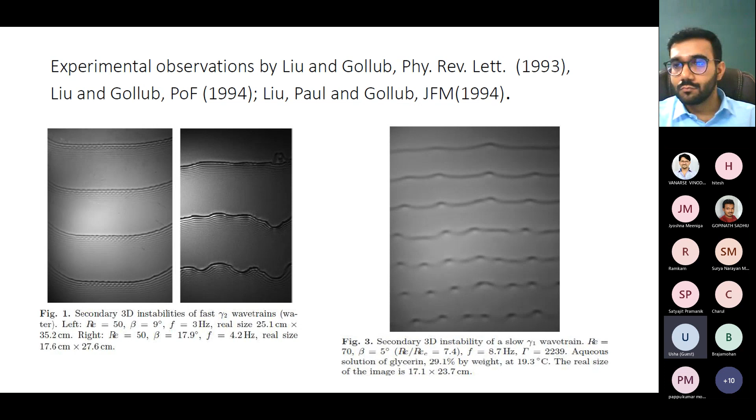As you see in these pictures, it displays a rich variety of spatio-temporal structures and also a sequence of wave instabilities and transitions. These are generic to a large class of hydrodynamic and nonlinear systems.

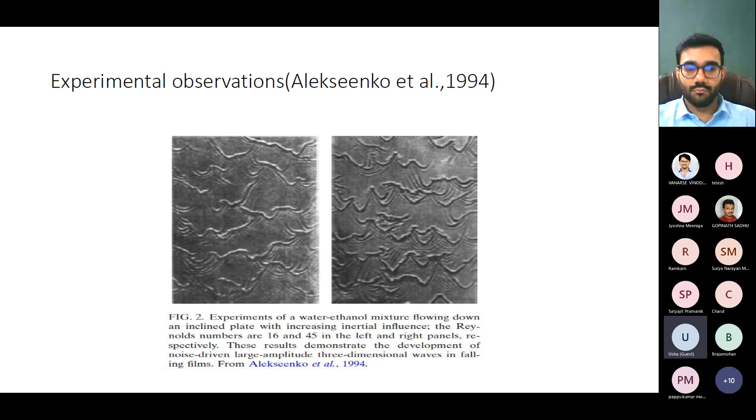The pictures you have seen are experimental observations by Alekseenko and co-workers, and the earlier ones are from Liu and Gollub's experiments. Although the structures in the earlier pictures look very complicated, it is still possible to identify robust coherent structures, namely solitary waves, in thin films that appear to be a randomly disturbed surface. These solitary waves interact with each other continuously.

Therefore, falling liquid films can serve as canonical systems for the study of spatio-temporal chaos. Further, falling liquid films are typically associated with low flow rates and low pressure drops, small thermal resistances, and large contact area per unit volume.

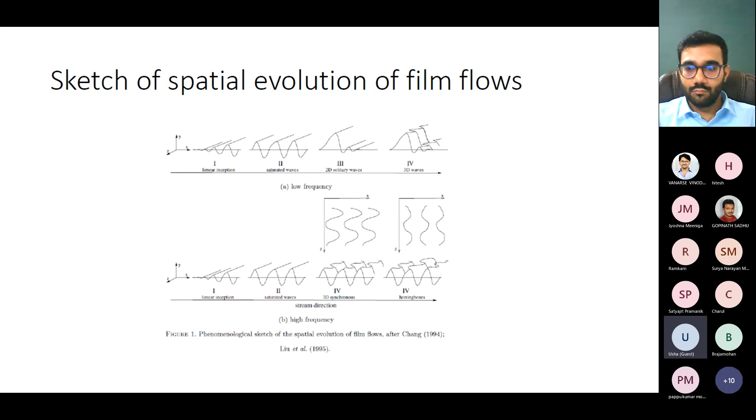So it's not a surprise that falling liquid films play a central role in a wide spectrum of engineering applications that includes cooling and coating processes. Therefore, there is a need for accurate understanding of the hydrodynamics of this class of systems, because it is crucial in the design of devices that exploit falling liquid films.

It is with this in view that several models have been developed, and extensive work has been done. These studies can all be viewed in the review works by Oron and Davis in 1997, and Craster and Matar in 2004, and also the nice book by Chang and Demekhin published in 2002.

So what do these investigations tell us? The results tell us that the solution is unstable to long waves if the Reynolds number exceeds 5/6 into cot theta, where theta is the angle of inclination of the inclined plane to the horizontal. So solving the Navier-Stokes equation with a free surface which is unknown a priori is a difficult one.

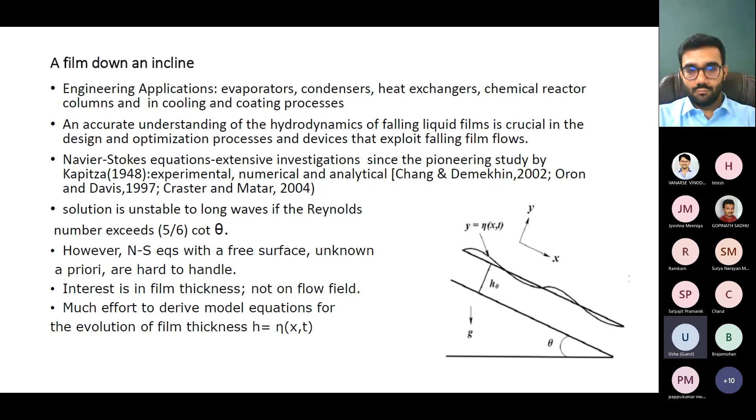It's very hard to handle, and the interest is only in how the film evolves, namely determining the free surface thickness and not the flow field. Therefore, the efforts have been towards deriving model equations for the evolution of the film thickness.

The pictures we have seen clearly show us that the space-time evolution of waves are slow at low to moderate Reynolds numbers. In addition, we observe that the internal fluctuations remain slaved to the local film thickness H.

This suggests that one need not solve a three-dimensional problem. One can completely eliminate the cross-stream velocity from the velocity field, reducing the three-dimensional problem to a two-dimensional problem. This can be further simplified to a one-dimensional problem so long as the secondary instabilities do not introduce any span-wise modulations.

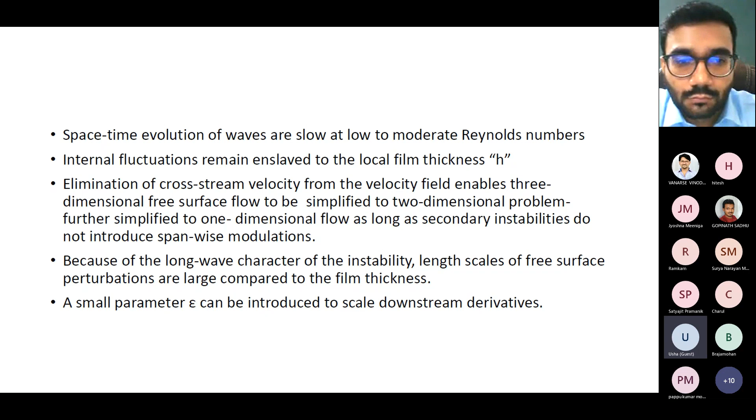So what happens? We have a long wave character of instability, and hence the length scales of the free surface perturbations are large compared to film thickness. So that helps us to introduce a small parameter. Suppose I call it epsilon, so that we will be able to scale down these downstream derivatives with the help of this small parameter.

So all these features that we have listened to so far suggest that we should be able to employ a modeling strategy that makes use of this long wave character, namely that there is a small parameter epsilon, and Benney made use of this modeling strategy.

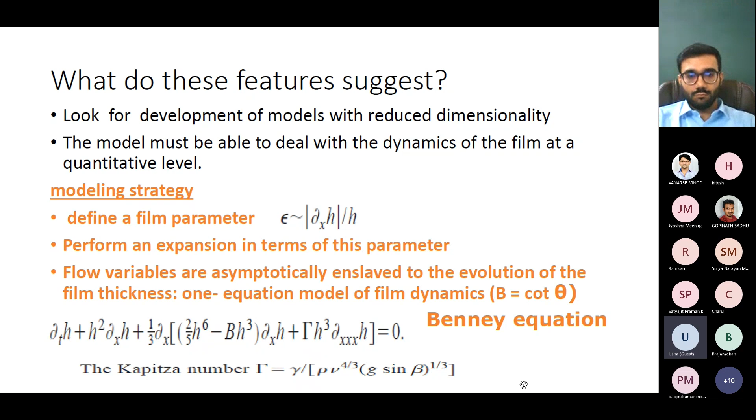He expanded all the flow variables in terms of the small parameter epsilon, and under the assumption that the flow variables are all asymptotically enslaved to the evolution of this film thickness H, he ended up with a one equation model. This equation had only one unknown, the film thickness H, and this is referred to as Benney's equation, a one equation model that describes the evolution of film thickness of a thin film over an inclined substrate.

But unfortunately, there are drawbacks in Benney's model, in that the solution has a finite time blow up not far beyond the threshold, in spite of the regularizing effects of the surface tension.

So there were efforts to cure this drawback by including higher order terms when the expansion with respect to epsilon is considered. However, a Pade resummation technique was also employed, but all these did not yield satisfactory results. They ended up only in underestimating the amplitude and wave speed of the solitary waves.

So what do we get as the message from the one equation model? The one equation model is not at all capable of describing the dynamics of this thin film sufficiently far from the threshold. Therefore, it is of no use taking the one equation model, namely that developed by Benney, for describing the dynamics.

Although the only advantage here is that it could correctly predict the instability threshold, it could not avoid a finite time blow up.

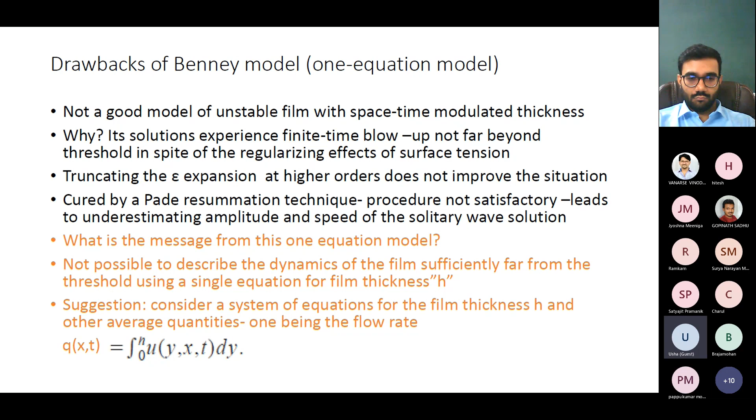So Shkadov took this suggestion and developed a two-equation model with two unknowns, one being the local thickness, and the other being the local flow rate, namely Q.

And his assumption was - what did he do? He started with a streamwise parabolic profile U, and using this, integrated the streamwise momentum equation and the continuity equation by taking U as this profile. He ended up with evolution equations for the unknowns H and Q, which are these two equations.

What was his assumption? The assumption was that the velocity remains self-similar and parabolic even out of equilibrium. That was the basic assumption underlying Shkadov's model.

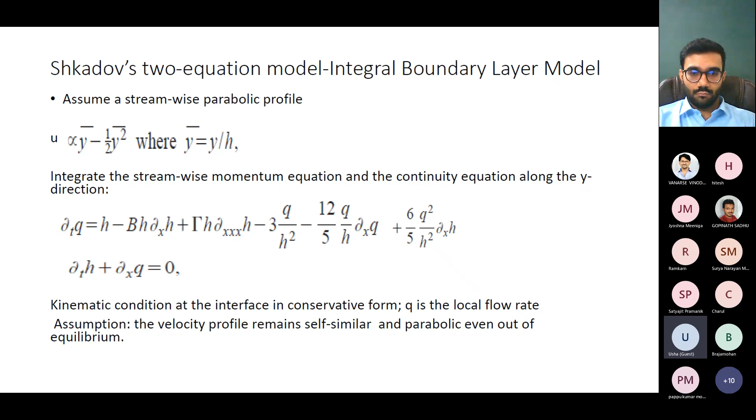But again, this two-equation model had some limitations, namely it could not predict the instability threshold accurately. The instability threshold predicted by Benney's model is 5/6 cot theta. Not only Benney's model, the experimental predictions also gave the result as 5/6 cot theta.

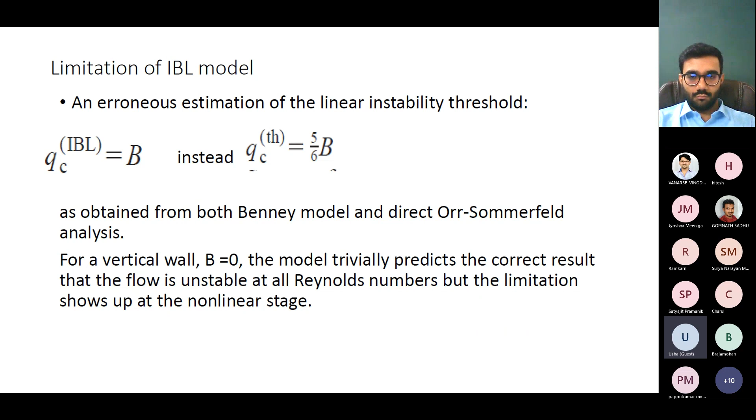But Shkadov's model predicted it to be simply cot theta, and therefore the prediction was erroneous, although he took into account two unknowns h and the local flow rate. When b equals 0, that is for a vertical wall, his prediction trivially was correct, that the flow is unstable at all Reynolds numbers, but the limitation in the model showed up while describing the nonlinear evolution.

So what was the reason for this failure of the two-equation model? It was attributed to the lack of flexibility of the assumed parabolic profile. That is, the assumption that the flow remains parabolic even out of equilibrium was basic in the development of Shkadov's model, and that did not give any flexibility to the model, as it cannot remain parabolic as the film evolves.

So there will be some deviations. Being a thin film, the deviations should be properly accounted for while taking the velocity ansatz. That did not happen when Shkadov assumed that the velocity is self-similar and parabolic. People tried to cure this failure by assuming a generalized parabolic profile, or parabolic profile with Pade approximation, and other things, but they were not successful. The experimental observations and numerical predictions clearly showed deviations from the parabolic profile, which is the reason for the failure of Shkadov's integral boundary layer model.

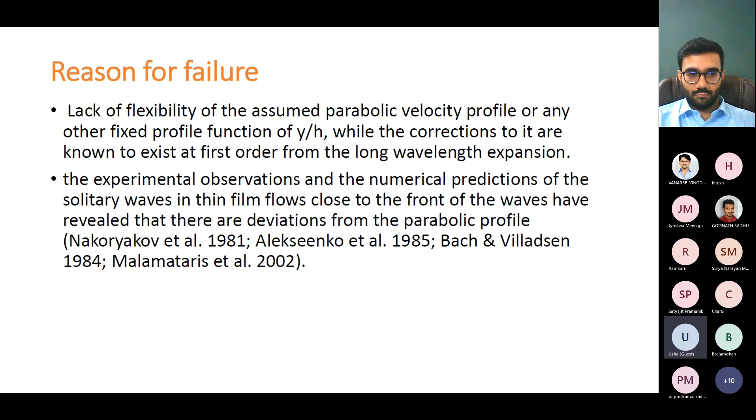Following this, there were several investigations, as I said, using the general parabolic profile, or the energy integral approach which accounts for energy balance, or a self-similar parabolic profile with Galerkin projection considered in center manifold analysis. All these gave the instability threshold accurately. However, the quantitative predictions regarding wave speed and wave height were not as accurate as the experimental observations.

Then Ruyer-Quil and his group developed the weighted residual technique, which Dr. Sangashri also spoke about. This weighted residual technique was able to predict as closely as possible the non-linear wave characteristics, and it became the standard technique for solving thin film flow problems down an inclined substrate, taking into account different aspects associated with practical applications.

And recently, Amaouche and his group worked on a model where they considered the double weighted residual integral boundary layer model developed by Ruyer-Quil and his group. But they introduced a free parameter which helped refine the velocity profile, and this free parameter acted as a parameter that can be tuned to get the desired wave characteristics. They showed substantial improvement in the predictions in the inertia-dominated regimes.

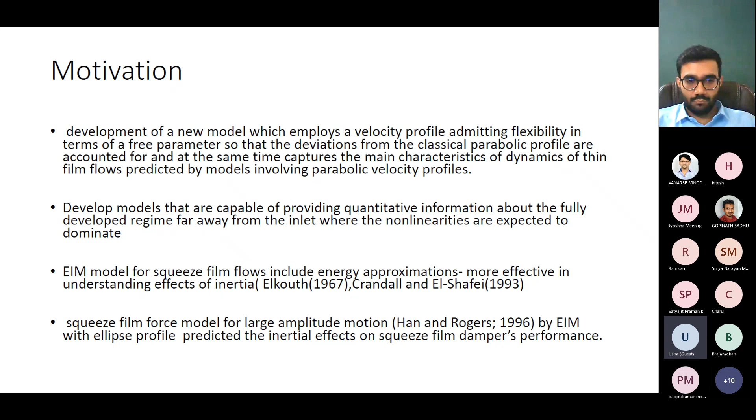It should be less than 1, which is the condition when we take an ellipse profile, but this constraint helps us tune the profile in such a way that we are able to arrive at the desired wave characteristics. So with these two ideas in mind, we thought we would develop an energy integral model with an ellipse profile as a weight function and develop a two-equation model.

So with that in mind, we started our model derivation. Our Navier-Stokes equations with the continuity equation are the governing equations, and the boundary conditions are no-slip at the inclined substrate, and at the free surface y equals eta of x, t. The conditions are the kinematic free surface condition, and the balance of normal and tangential shear stress at this free surface.

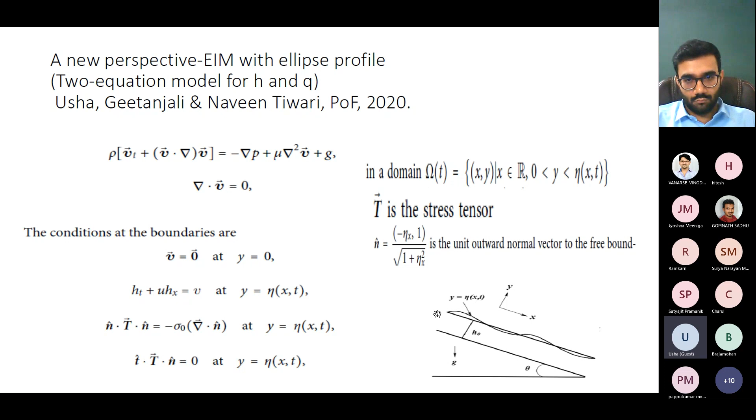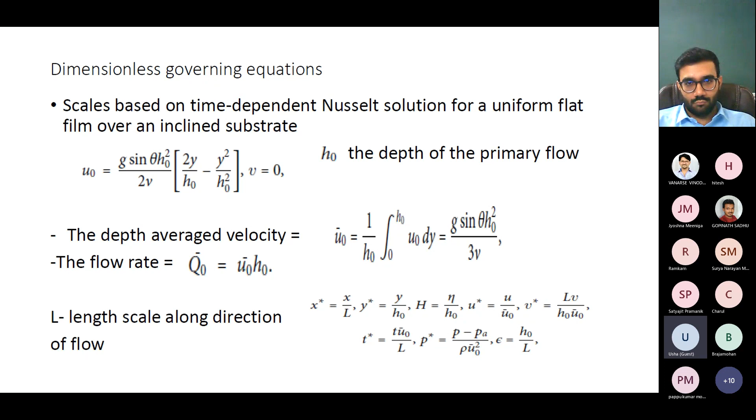So we wanted to non-dimensionalize the governing equations. We took scales based on the time-dependent Nusselt solution, and the corresponding dimensionless equations and boundary conditions were obtained. So, as I said, our goal was to derive a model.

We did not aim at developing a model which would be as accurate or more accurate than the standard WRI-BL model. This was our first attempt to derive a model which doesn't involve a parabolic profile, but which should be capable of predicting the linear instability threshold accurately, and capable of predicting the nonlinear dynamics at least as well as the available standard model. The available standard WRI-BL model is a second order consistent model, so we thought we would be happy with a first order consistent model that could predict the instability threshold accurately and capture the nonlinear dynamics as accurately as possible.

With that as goal, we started working on the details. Our goal was to develop a two-equation model which is first order consistent, describing the local film thickness and the local flow rate. The model would take care of the energy balance, and it would use the ellipse profile, and therefore there is eccentricity intrinsic to the ellipse profile, which can be tuned to get the desired characteristics, so that our model is able to capture the results which are already available. Does it perform as good as the available models? Once we are satisfied with that, we can work more on it and develop better models to get the desired characteristics as predicted by experimental observations.

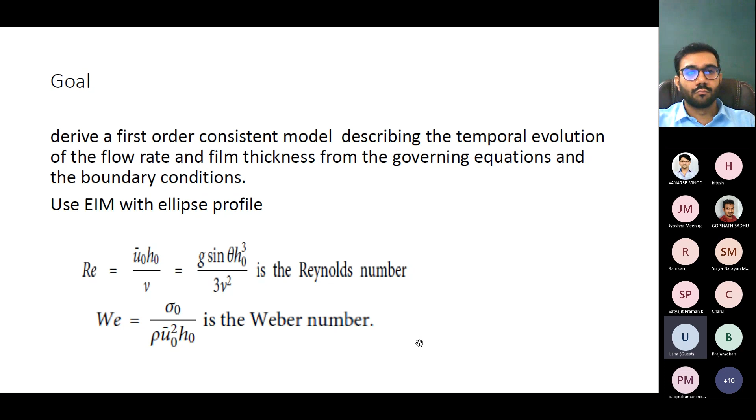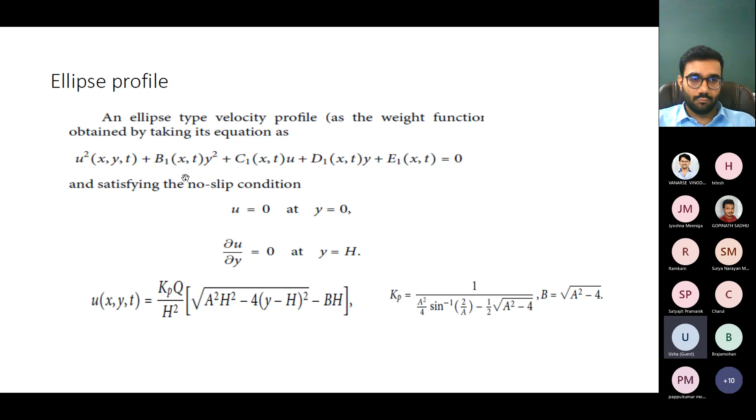So with that as goal, we worked to derive the ellipse profile. We took the general equation of the second degree and applied the boundary conditions to get the profile, which we wanted to use as the weight function as in Galerkin approaches. The no-slip condition at the substrate and no shear stress at the free surface, when applied, gave us this profile, which can be written in the form of an ellipse. This told us that the ellipse profile satisfying these conditions has major axis kp squared into a squared, minor axis a squared by 4, related by b squared equal to a squared into 1 minus e squared, where the equation of the ellipse is x squared by a squared plus y squared by b squared equal to 1.

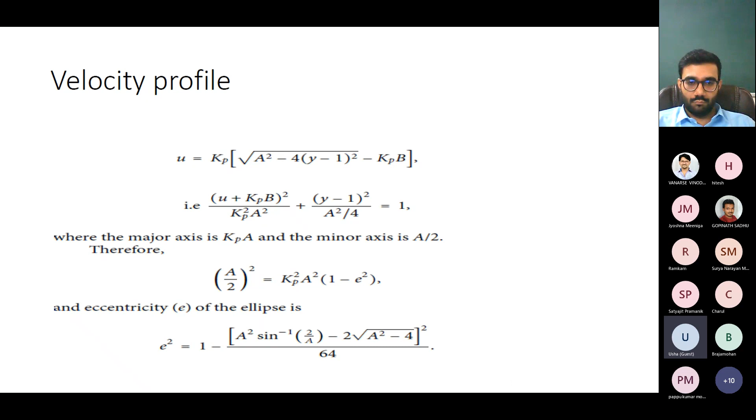So we see that the eccentricity of this ellipse profile is expressed in terms of this free parameter a. By varying the parameter a, tuned with the condition that e remains less than 1, we should be able to arrive at a model capable of capturing the instability threshold accurately and performing as good as the available models as far as the nonlinear dynamics is concerned. So we varied this value of A, and observed that as A is increased, the eccentricity increases and approaches the value 1. This parameter A modifies the ellipse profile, serving as a free parameter which can be tuned to achieve the desired wave characteristics.

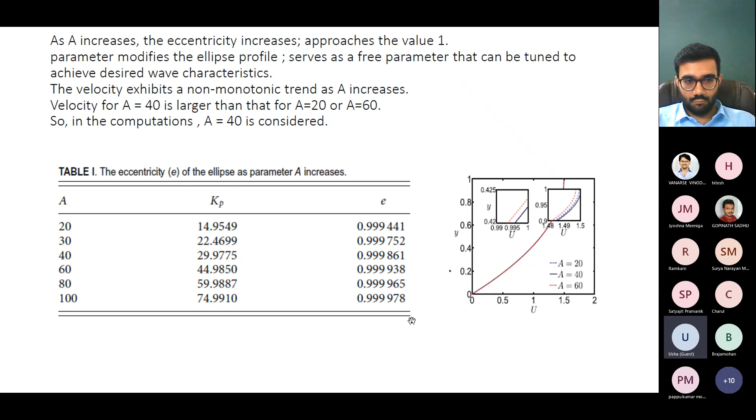We observed that the velocity exhibited a non-monotonic trend as A increases, so the velocity for A equal to 40 was larger than for A equal to 20 and 60, so we took the value of A equal to 40 in our computations. This is not the only reason we took A as 40 - from the nonlinear analysis also, we would be able to show that A equal to 40 is an appropriate value with which we can work so that we are able to achieve the desired goal.

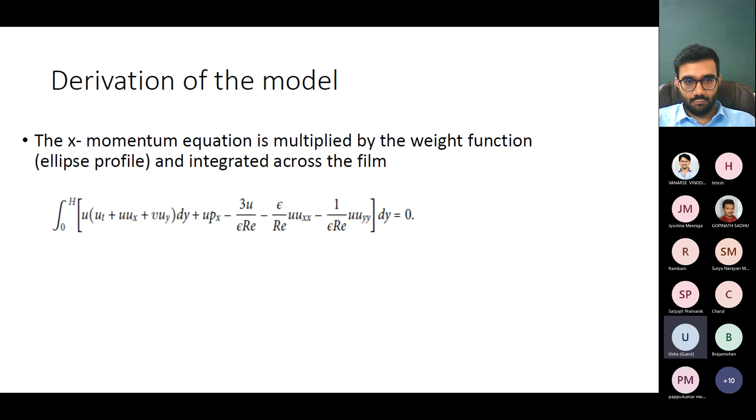So what did we do? We took the ellipse profile, multiplied the x-momentum equation with u so that the energy balance is accounted for, integrated across the film thickness, and ended up with a two-equation model involving the local film thickness H and local flow rate Q. With this evolution equation, we wanted to see what it gives for the instability threshold, so we imposed infinitesimal two-dimensional disturbances on the base flow in order to determine the instability threshold predicted by this model.

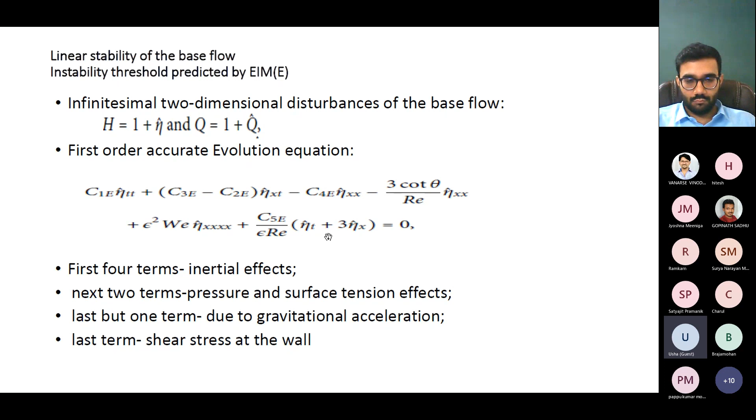We ended up with the evolution equation as this. The first four terms in this equation contribute to the inertial effects. This term and this term tell us about the pressure and surface tension effects. The term here, eta hat suffix t, arises due to gravitational acceleration, and the last term is due to the shear stress at the wall.

So we took a wave-like disturbance, a sinusoidal disturbance, and substituted it into the evolution equation, ending up with a dispersion relation, which is a quadratic equation for the complex phase velocity c. The real part gives us the phase speed, and the imaginary part gives us the linear growth rate.

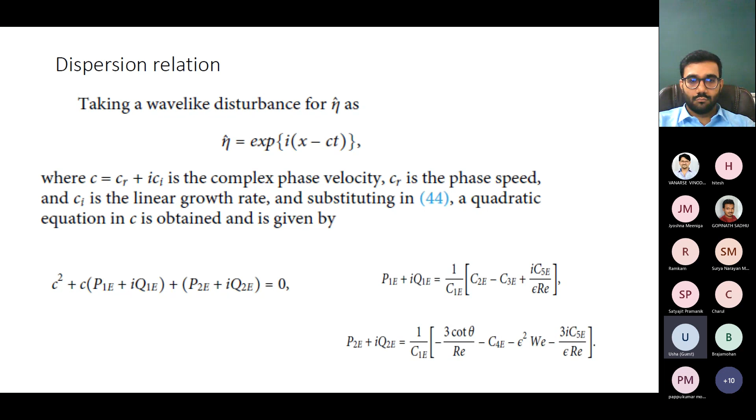So when the linear growth rate Ci is greater than 0, the flow is unstable. Ci less than 0, the flow will be stable, and Ci equal to 0 gives us the neutral boundary, which splits the parameter regime into stable and unstable regions.

So we drew the marginal stability curve by taking Ci equal to 0. That gave us the instability threshold as cot theta by Re equal to the right hand side, which depends on this parameter capital A.

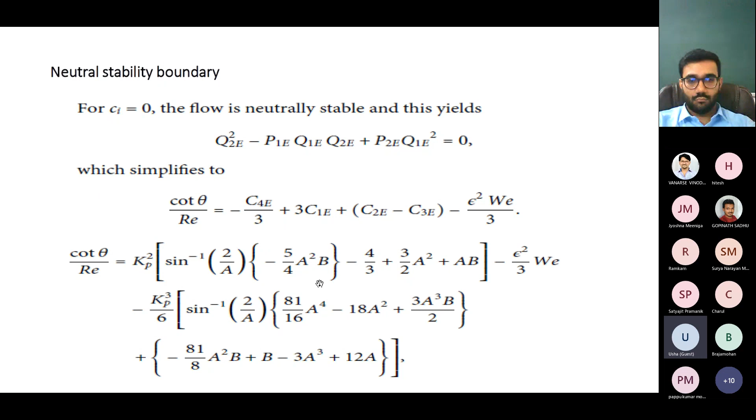So we wanted to plot this cot theta by Re. We saw that cot theta by Re asymptotically approaches the value 1.2, which is the critical value predicted by the available standard model, the weighted residual integral boundary model, and the energy integral model by taking a parabolic profile as the weight function.

So we named this model EIME, to say that it is the energy integral model with the ellipse profile as the weight function. So I refer to the model as EIME.

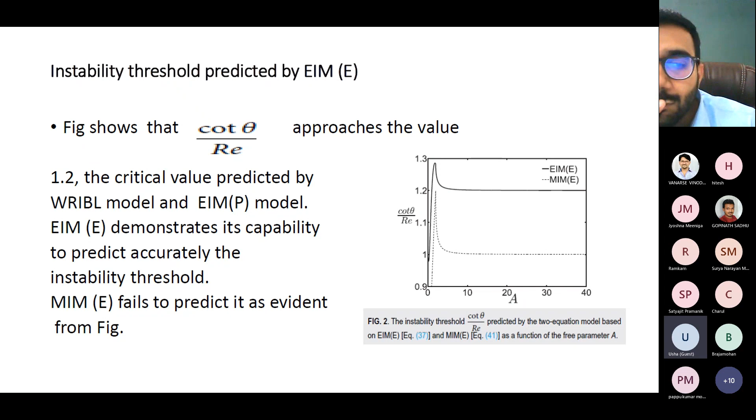This EIME model demonstrates its capability to predict asymptotically the accurate value of cot theta by Re, equal to 1.2, which was predicted by experiments as well as the available standard model. Whereas the momentum integral model, derived by Shkadov, could not predict this value because of the lack of flexibility of the parabolic profile.

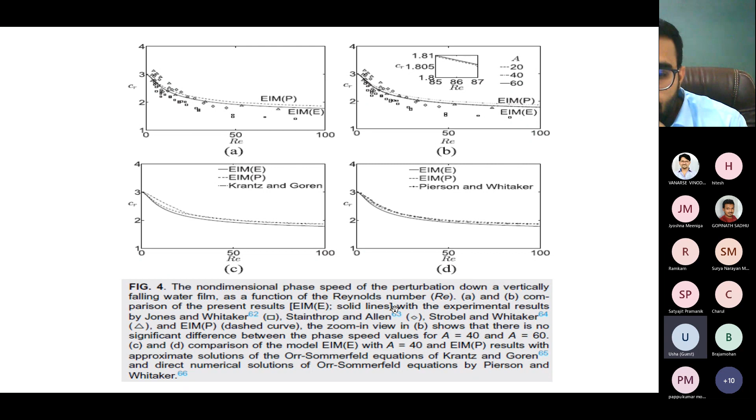We have compared with different models as well as the available experimental results, and we observe that the EIME model follows the trend and is in close agreement with the available experimental observations as well as the available standard model predictions.

So the comparison of the wave speeds, seen in the earlier slide, with experimental observations for a vertically falling film clearly shows that the experimental observations and the EIME model are very close to each other for moderate Reynolds numbers.

Further, the approximate solutions obtained by Krantz and Goren, and the conclusions based on his approximate solutions, match with the current model's results.

Also, the direct numerical simulations of the Orr-Sommerfeld equations performed by Pierson and Whitaker, and his conclusions, are confirmed by our model.

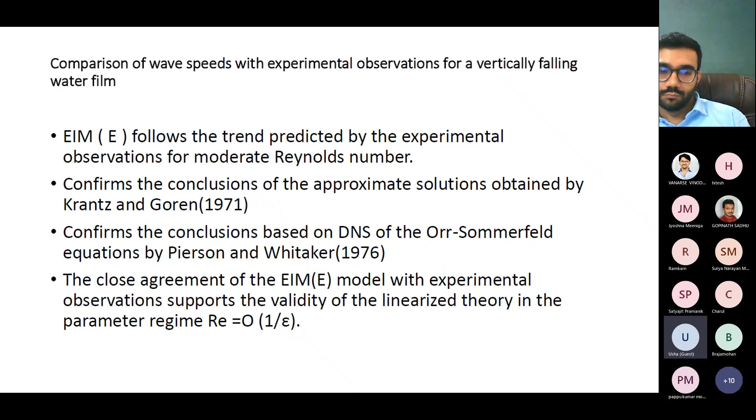The close agreement of our model with experimental observations clearly supports the validity of the linearized theory in the parameter regime where Reynolds number is of order 1 by epsilon, meaning for moderate to large Reynolds numbers our predictions are accurate and in close agreement with the experimental observations and standard model predictions.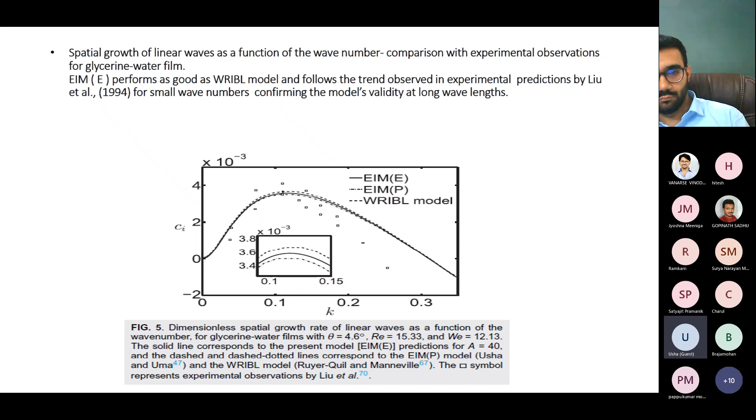So we moved on, having been satisfied with its performance in the linear regime, to work on the nonlinear evolution of the free surface. We tried to understand the existence and properties of the nonlinear two-dimensional waves generated by this model beyond the threshold for instability.

Full numerical solution of the coupled nonlinear equation was performed in a computational domain of length 2 pi, with a uniform base state of unit thickness, and we examined the growth of an initial sinusoidal disturbance to the base state.

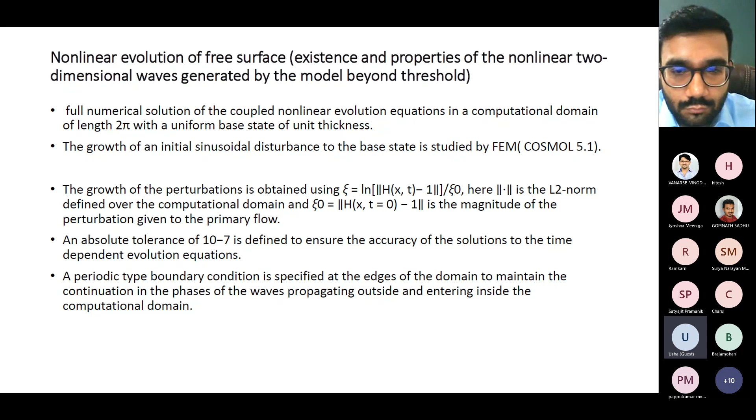This was done using the finite element method, employing the commercial software COSMOL. We determined the growth of perturbations using a measure xi, defined as the log of norm h minus 1 by xi naught, where the norm is the L2 norm over the computational domain, and xi naught is norm h evaluated at t equal to 0, minus 1. This represents the magnitude of the perturbation given to the primary flow. Our computations required accuracy to 10 to the minus 7, and we solved the time-dependent evolution equation using periodic boundary conditions.

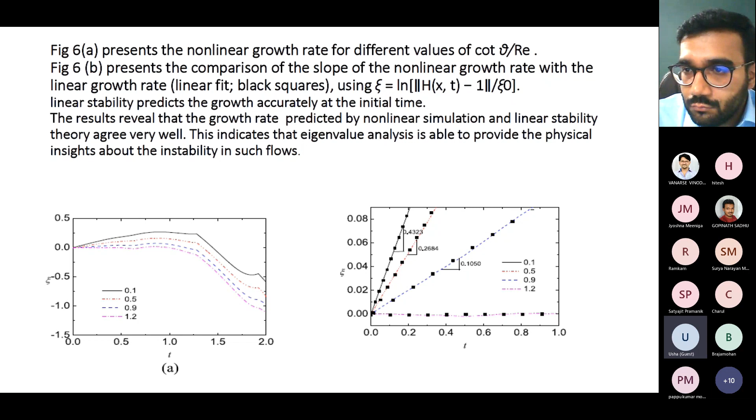We observe that the linear stability predicts the growth accurately at the initial time, and further, the growth rate predicted by the nonlinear simulation and linear stability agree very well. This clearly shows that the eigenvalue analysis, namely the linear stability analysis we performed, is capable of providing physical insight about the instability in such flows.

We went on to draw the nonlinear evolution, namely film thickness as a function of x, the streamwise coordinate, at different times. We observed that as time progresses, the amplitude of the disturbance given to the system decays, and the thickness of the film ultimately reaches the base state thickness. This clearly indicates, as Liu remarked, that the instability is of convective type.

I recall my statement earlier that the falling liquid film is a convectively unstable open flow system, and our results clearly indicate that the instability is of convective type.

Professor Usha, sorry to interrupt, but could you maybe complete in a couple of minutes? Yeah, another 2 minutes and I'll be completing. Okay, no problem. Thank you. So as a result, what happens to the perturbations?

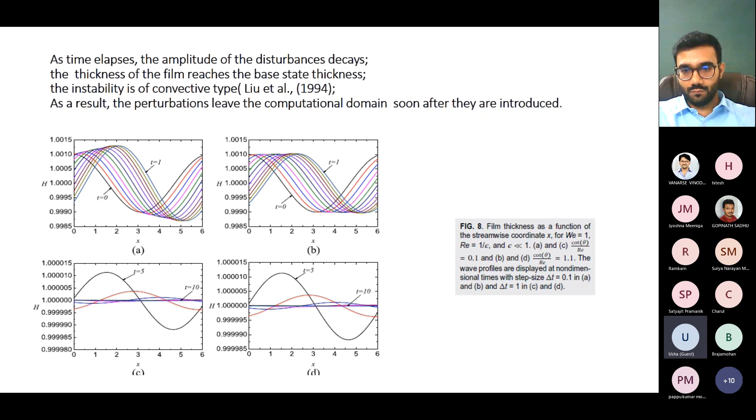Perturbations leave the computational domain after they are introduced, indicating that the instability is of convective type. These are all the results of nonlinear simulations.

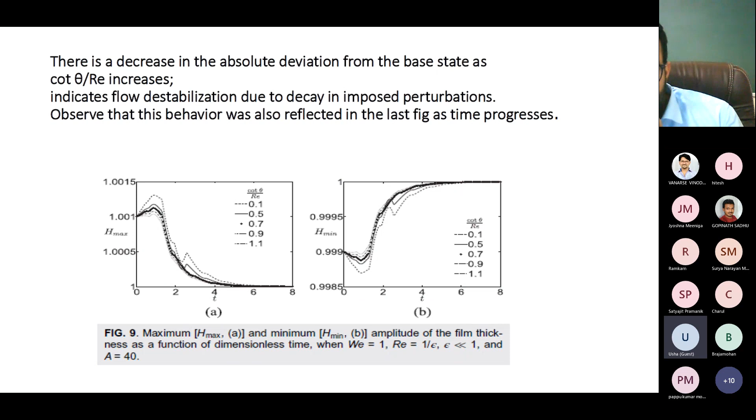Recall the earlier picture I had shown, which also exhibited this behavior. The result of predicting the maximum and minimum thickness reflects the earlier results where we drew the nonlinear evolution.

So highlighting the outcome of this simple first-order consistent model, taking a profile with a free parameter that can be tuned to achieve desired characteristics, we can say our model's performance is quite satisfactory in the linear regime, and also satisfactory in capturing the behavior of nonlinear waves at a moderate distance from the instability threshold.

As I said, the value of the free parameter A, which is intrinsic in the ellipse because it is related to the eccentricity of the ellipse, is taken as the weight function. You remember I told you that in our computations, A is equal to 40. I had given the reason coming from the base velocity.

We were also able to choose the value of A based on our nonlinear simulation, because we observed that when we took A equal to 40, the results showed closeness of the linear growth rate and phase speed for this value of A to the available experimental observations.

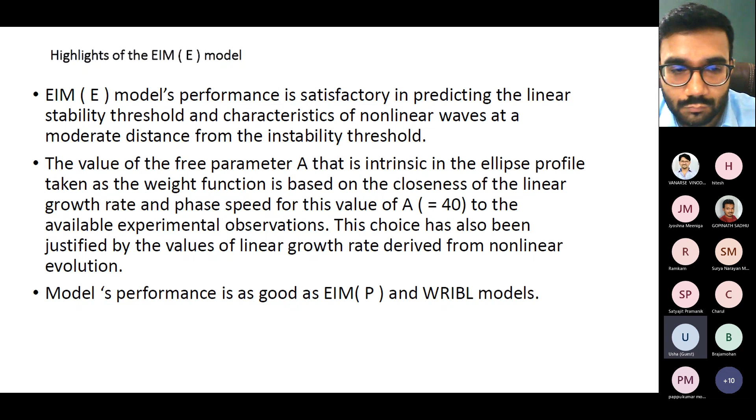This choice has also been justified by the value of the linear growth rate derived from the nonlinear analysis, and therefore the reason for choosing the free parameter value as A equal to 40 is justified. We have been able to show that the model's performance is as good as the available standard models, namely the weighted residual integral models.

But there are limitations of this model. What is it? It is a first order consistent model in both inertial as well as viscous terms. This model, using this procedure, we may not be able to get a second order consistent model, for the simple reason that the profile we have taken is not a self-similar profile.

And therefore, the model that we may get as a second order model, by incorporating second order viscous effects, will be a model which takes into account the second order effects of the viscous terms, but it will not be able to capture the nonlinear characteristics correctly, for the simple reason that the model equation will not have the required structure to capture the nonlinear wave characteristics.

And therefore, something more has to be done. Taking this ellipse profile itself, something more has to be done in order to get an accurate model which is second order consistent, right? Then next, the model cannot capture the transition to absolute instability, because the model is based on long wave analysis.

So all these three issues have been addressed in our recent work, which is based on a new model that uses the suggestions given by the perspective which came from this work presented in this talk. And that work has also been accepted for publication in JFM, and you may look it up as soon as it is published.

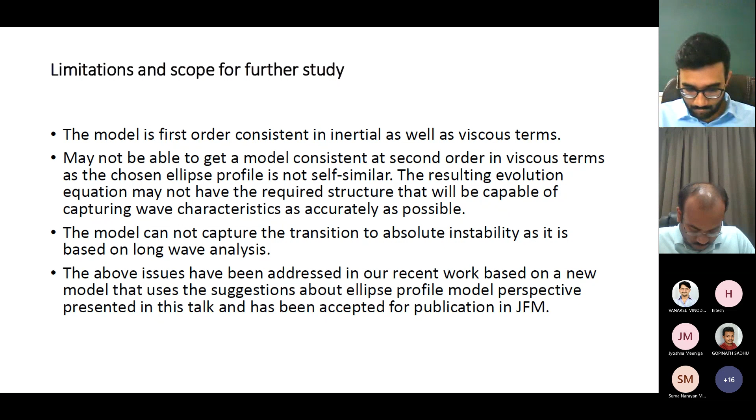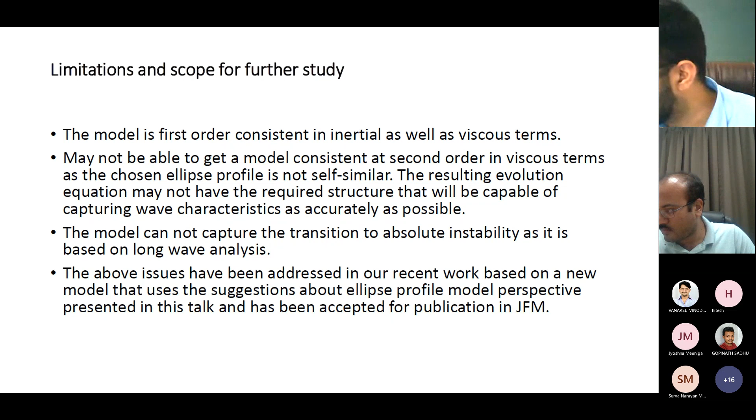As I said, what was the limitation in Benney's model? In Benney's model, there was a finite time singularity in his solution. The reason being, he only took terms up to order of epsilon. Higher order terms, which helped to cure that, also did...